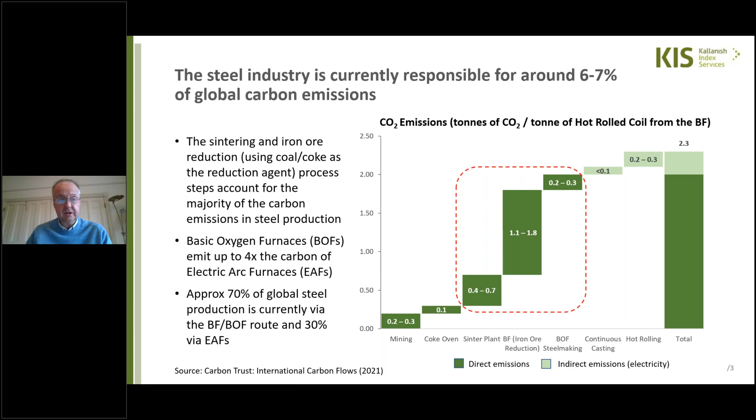At the moment, just over half of the major steel companies around the world have published their carbon emission reduction targets to get to net zero by 2050, or in some cases a bit before then. Here's a selection, and Europe is leading the way. It does vary by region, but I think virtually every West European steel company has a plan, while in other regions it's more patchy, it has to be said.

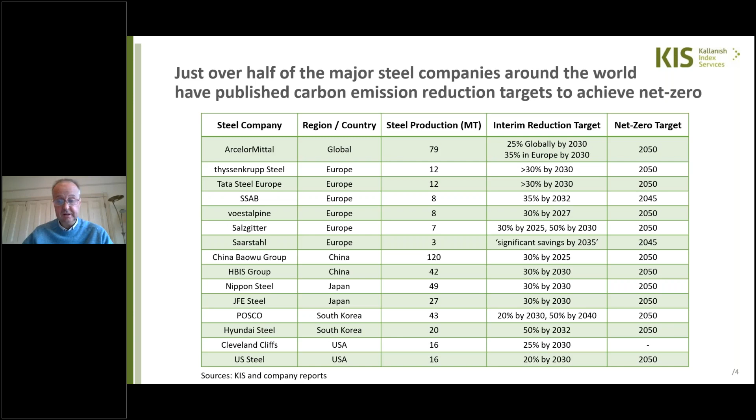Given that the largest companies are going to have the biggest impact on global emissions - and six of the 10 largest steelmakers are in China - you can appreciate that at the moment it's around 13 of the top 25 steel companies that have plans. So there's still quite a long way to go outside Europe for getting all of this in place. And I think even more importantly, few companies, although notable exceptions including our guests today, have committed much capital to this so far. In a lot of cases, it's more talk.

Blast furnace operators can reduce their carbon emissions to some extent by optimizing existing processes, and certainly by implementing some carbon capture on off gases and so on, as the table below shows. But if you're going to achieve significant reductions and get to net zero, it's hard to see how that can be done without investments from companies that have blast furnace routes.

This either means investing in existing technology, effectively electric arc furnaces melting scrap and DRI, or looking at new technologies that will enable iron ore reduction in the blast furnace without the use of coal, carbon and coke. But in all approaches, hydrogen looks as though it's going to play a major role, whether it's producing green direct reduced iron to go into EAFs or through another process.

Most steel companies are taking a multi-strand, phased approach as well. This isn't just jumping to the ultimate solution of net zero with a single investment bang - it's just not feasible. So most companies are putting together a package where they're optimizing routes, implementing capture or offset, and then looking to use new technology.

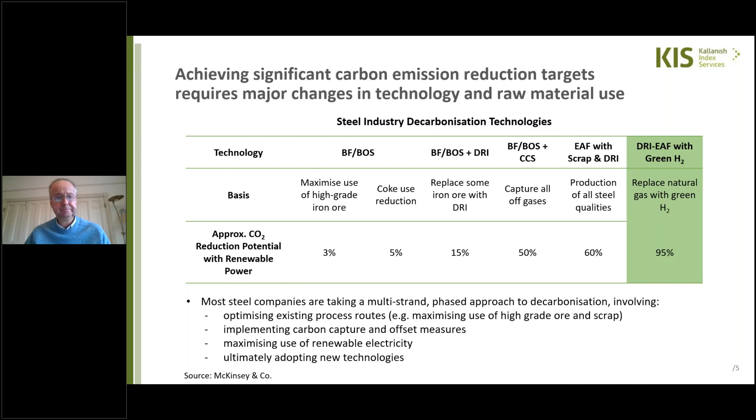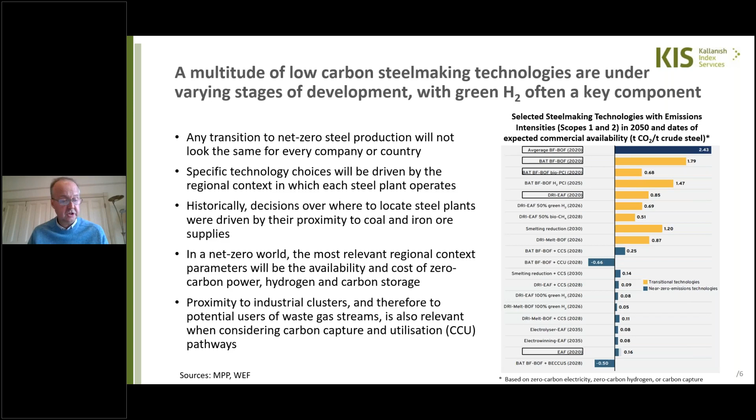There's a whole multitude of technologies under varying stages of development out there. As you can appreciate, this is such a big challenge, and there's lots of ways to approach it. It's certainly not going to be one size fits all when it comes to adoption either. Specific technology choices will be driven by the regions steel companies are in, and by their access to low carbon or zero carbon renewable power, their access to hydrogen potentially, their access to carbon storage, and so on. So it's a complicated arena, and not one that has a simple answer.

So if we just focus on the EU for a moment, as I've said, it's pretty much leading the world in the decarbonisation of the blast furnace route. Currently, about 55% of steel in the EU is made via that route. And the map on the right here endeavours to indicate many of those decarbonisation projects.

We're going to be hearing later from SSAB about Hybrit and from ArcelorMittal about its various projects. If we look at them overall across Europe, the numbers show the sort of projects, and some of those projects are named in the text on this slide. The majority, not all, but the majority include investment in producing DRI, certainly with the long-term intention of using green hydrogen as the reducing agent because of the zero emissions that's possible.

So if you look at the EU plans alone, just the EU, the DRI capacity additions that have been announced up to 2030 - so that's just in the next 7 years - amount to about 34 million tons of DRI. Now, global DRI production last year was about 119 million tons. So you can appreciate that's a significant investment, if - and it's quite a big if - all of that indeed happens.

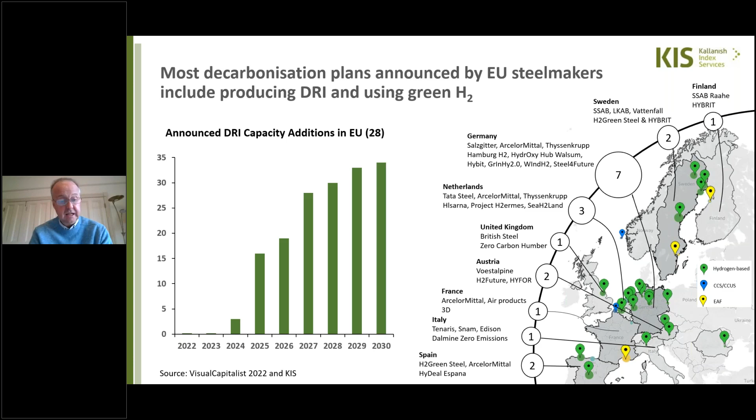And there's then significant implications for raw materials, because DRI, as it stands today, the process requires high quality iron ore, over 67% Fe, and only about 3% of the world's supply of iron ore is that sort of grade. So there's plenty of implications around this.

Let's just quickly look at some metrics about what the use of green hydrogen as a reduction agent for iron ore actually implies. I think the key metric to have in mind is that 1 ton of steel production, if you're going to use this route, requires around 50 kilograms of hydrogen. So 1 million tons of steel production requires 50,000 tons of hydrogen.

And if you're going to produce that with electrolysis so that it's entirely green, then that's a lot of electrolyzer capacity just for 1 million tons, as you can see from the numbers there, and vast amounts of renewable electricity are needed - getting on towards 5 terawatt hours to produce that amount of hydrogen. And indeed, quite a lot of water - 450 million litres are required to produce the hydrogen necessary to produce 1 million tons of green steel.

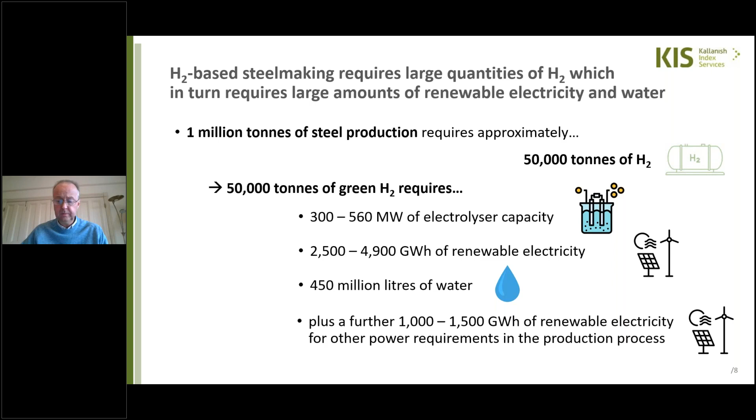So you can quickly see that the magnitude of the numbers is significant when you look at the world - the world produces nearly 2 billion tons of steel, more than half of that in China, of course, and about 1.3 to 1.4 billion tons of that is via the blast furnace BOF route. The balance, 600 million tons or so, is electric arc. So, never mind 1 million tons of steel production, it's more like a billion tons that's going to need to find another reducing agent than carbon for getting to iron.

Cost is another key factor. Most hydrogen produced today is grey or brown, produced using natural gas and without carbon capture. You'll see costs around $1, maybe $1 to $2 per kilogram of hydrogen for that. But once you start adding carbon capture, it gets more expensive, and certainly the electrolysis routes available today, at the scales available today, see those costs going up.

We'll hear more about that from other panelists. But the table and charts here show Kallanish Index Services, which is tracking hydrogen costs for different technologies in different regions around the world, different locations, and this is the sort of ranges we're seeing for the levelized cost of production over the lifetime of the project at the moment.

That cost is highly dependent on electricity, renewable electricity costs. So that's one of the key drivers there. Utilities alone, with water and so on, is getting on for 3/4 of the cost. Now, at the current costs we're seeing for green hydrogen, that's going to add up a lot to the cost of producing a ton of steel - hundreds of dollars potentially at this sort of level.

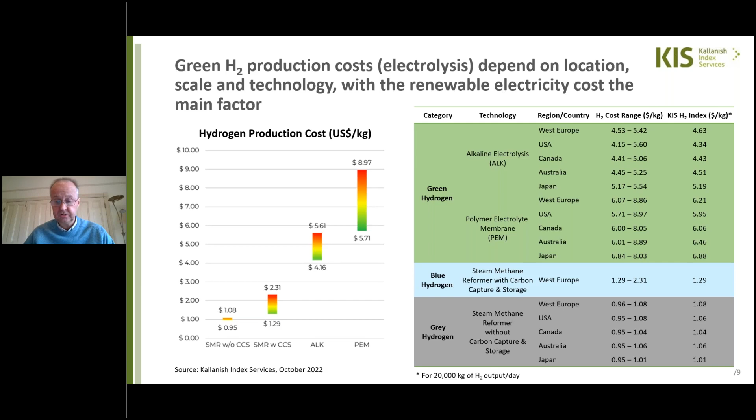It's estimated that those costs have got to come down quite a lot as the scale of electrolyzers and so on increases. This can be possible, and renewable energy costs decrease too. Now, regions with the natural resources to do this - and that's again back to renewable energy first and foremost, sun and wind, and hydro where it's available as well - these are going to be the low-cost areas to produce hydrogen.

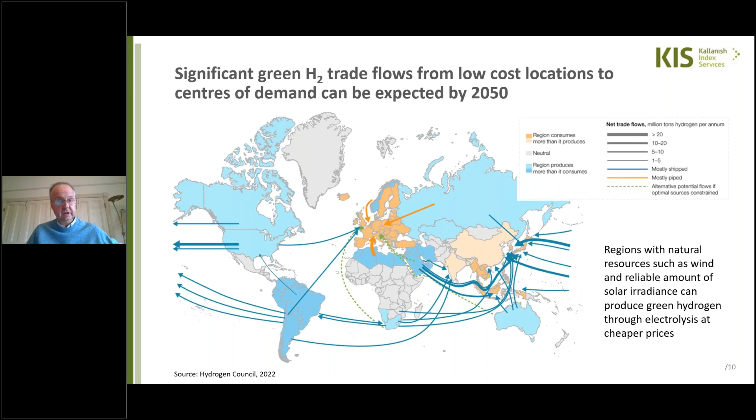So that's likely to set up significant trade flows for hydrogen if this level of hydrogen is going to be used, this quantity, to decarbonize the industry. So I think the message is pretty clear, isn't it? Green hydrogen can decarbonize the steel industry, but it's going to involve massive challenges.

First and foremost, the scale of hydrogen generation that's going to be required. Go back to that - 1 ton of steel needs 50 kilograms of hydrogen. If you're going to use this approach, then the estimates get you up to something like 52 million tons of green hydrogen per annum. And the world today is only generating less than 100 million tons of grey hydrogen for all purposes. So you can see the implications there.

Scale of renewable energy, obviously vast. Again, according to Wood Mackenzie estimates here, the steel industry alone would need 2/3 of the current renewable energy capacity, and obviously most of that is going into power. The costs we've talked about, and the availability of that high-grade iron ore, if you're going to use the existing DRI route. Now there's efforts to develop those technologies to enable them to be used with lower content Fe, so that iron ore supply isn't going to be such a constraint.

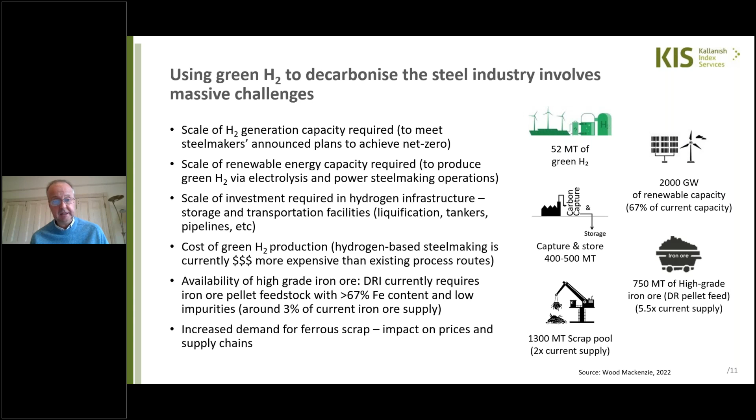Also increased demand for scrap, maximising the use of that, but that's going to have an impact on prices of scrap and trade flows. Big exporting regions for scrap today may be hanging on to that scrap far more, and that'll have implications for regions that currently rely on importing scrap.

So those are some of the challenges, and that's before we even talk about the money. There's the investment required, and again, a Wood Mackenzie estimate here - but if the steel industry is going to achieve net zero by 2050, they're putting the costs of doing this, for investments, in the order of sort of $1.4 trillion US. So that's no small challenge, and you can see most of that going into the iron making, steel making sort of areas.

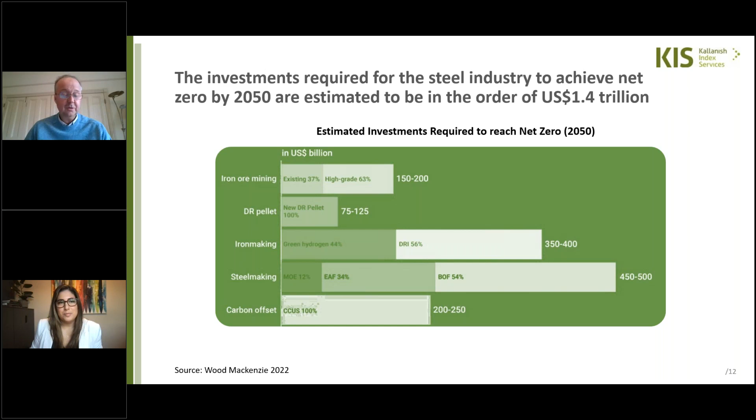Inevitably, the question is, where's the money coming from? The steel industry hasn't always comfortably achieved a good return on its capital. So finding this sort of money to make these investments to achieve this is no small question.

That sort of wraps up my overview. As I've said, Kallanish Index Services, as Gabriella mentioned, is a new subsidiary of Kallanish, and it's going to be launching its hydrogen subscription service sometime next year. Kallanish Index Services focuses on the data side of things, complementing the news and other insights you've already received from Kallanish. We'll be tracking those hydrogen production costs, tracking projects around the world for ammonia as well, looking at breakthrough technologies where they are emerging to try and change some of the equations we've seen here about what's required, and so on.

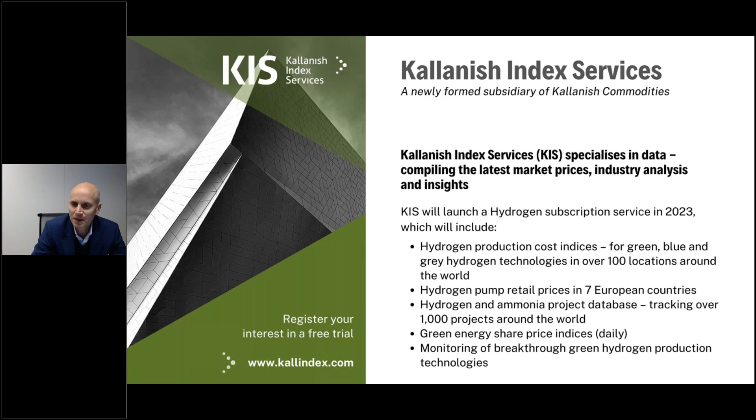Håkon, can you please tell us about how green hydrogen can be produced and all about electrolyzers? Please, the floor is yours. Sure, thank you, Gabriella. My name is Håkon Volldal, I am the CEO of Nel Hydrogen, and I'll give a short introduction to Nel and hydrogen for steel making.

Nel is a global dedicated hydrogen technology company. We deliver solutions to produce, store, and distribute hydrogen from renewable energy, what we call green hydrogen. Our mission is to unlock the potential of renewables and enable global decarbonization. We cannot be successful without our customers, and as was presented just a few minutes ago, the steel industry could be a big user of electrolyzers and green hydrogen to decarbonize.

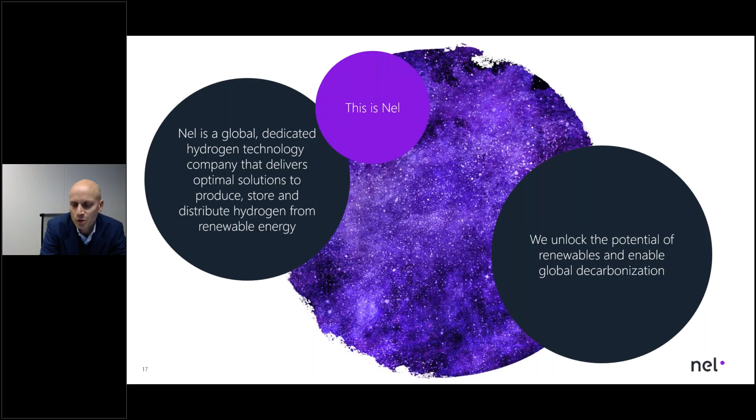Just a few facts on Nel. We can actually trace our roots back to 1927 when we installed the first electrolyzer in Norway, and I'll get back to that in a second. But the modern Nel started in 2014 when it was spun off from Equinor, the oil and gas company in Norway, and publicly listed on the Oslo Stock Exchange. We have the world's largest installed base of electrolyzers, roughly 3,500 units in 80+ countries, but bear in mind a lot of these installations are rather small electrolyzers.

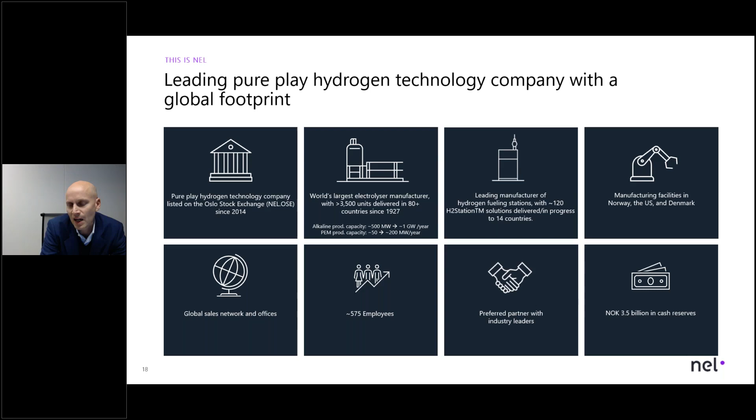We have manufacturing capacity in Norway, the US, and Denmark for fueling stations, which we also deliver. We have received orders for more than 100 fueling stations, but that is not the focus of this presentation. We have roughly 600 employees and a global sales network. We have been a preferred partner with industry leaders, not only in steel but in various industries, as hydrogen is increasingly being regarded as a solution to decarbonize. And we have raised close to 350 million euro to fund expansion of our manufacturing capacity for electrolyzers.

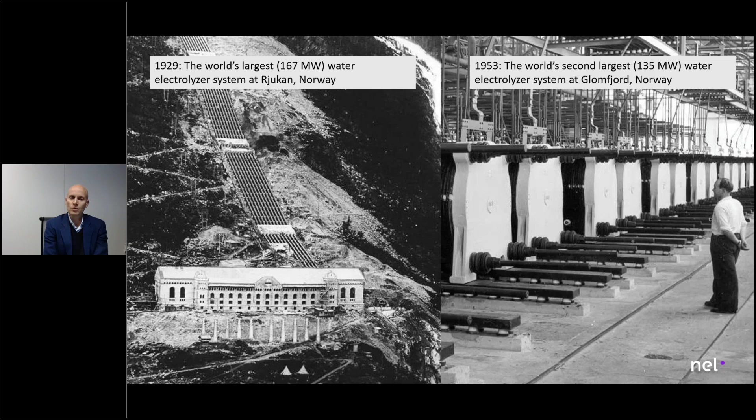I would like to start with this. Why do I start with this? Well, on the left-hand side you see the world's largest electrolyzer facility ever built. It's not in operation anymore, but the largest electrolyzer plant today is roughly 20 megawatt, in Spain, operated by Iberdrola, delivered by Nel. In 1929, the world's largest electrolyzer facility was built in Norway. It was based on hydropower, and it was used to produce ammonia for fertilizer production. And if we're into World War II history, this was the power station that was sabotaged by the Allied forces to stop production of heavy water, which is a byproduct from electrolysis.

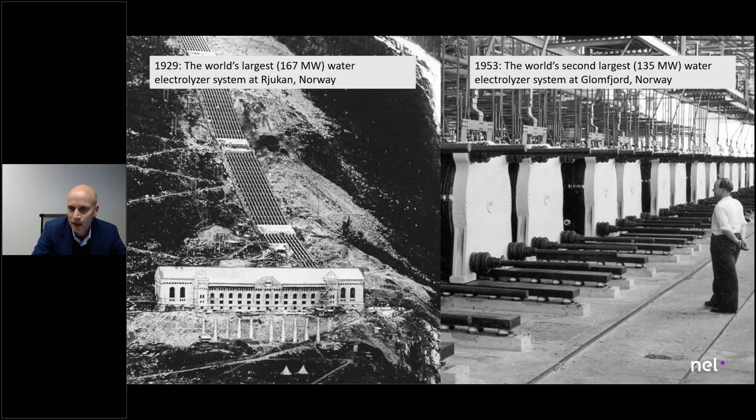On the right-hand side you see the second largest facility ever built, in 1953, 135 megawatt, also in Norway, for ammonia production. The reason I start with this is that the scale of what we're looking at, you get an impression by the picture on the right-hand side. This is what we're going to do in the steel industry, times a factor of 3, 4, 5, 6, 7. Most steel factories will need between 0.5 gigawatt and 1 gigawatt of electrolyzer capacity to produce what they want to produce. So the scale-up is massive, also in terms of electrolyzers.

We are doing our part. We are currently investing in both alkaline technology and PEM technology. We have atmospheric alkaline technology, and we are also developing a pressurized alkaline system. And we are looking at some future technologies that might bring together all the positives of the PEM technology, combining that with the positives of the alkaline technology.

But I have to be open, and I can be that because we are technology agnostic. There are numerous technologies out there, and I think it's fair to point out that no technology has only advantages. They have advantages and disadvantages. It depends on the application.

If you want to produce hydrogen at scale today, I would argue you only have one technology solution, and that is alkaline. Over time, you will have PEM. In the longer term, you will have solid oxide and some other alternatives. But today, only alkaline has been proven and tested at scale.

Because if you invest hundreds of millions of euros into a DRI facility and want to use electrolyzers, you have to make sure they actually work. And if you want the plant to run for at least 10, maybe 20 or 40 years, the electrolyzers should have a similar lifetime. Now, if you buy electrolyzers today, only one company has had electrolyzers in operation for 8 to 10 years. Actually longer, but typically an electrolyzer lasts 8 to 10 years.

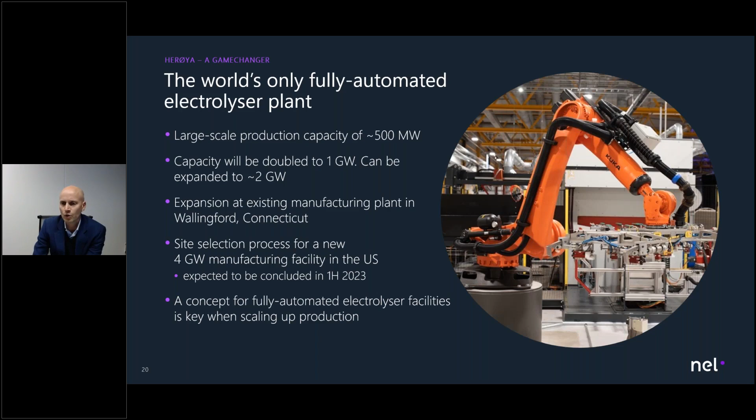Now, a couple of examples of what we have done. We have been involved—and SSAB will talk about this later—in a pilot project in Sweden where we replace coal with green hydrogen to produce the world's first fossil-free steel, done in August 2021. It's a 4.5 megawatt alkaline electrolyzer pilot.

We're also building a 20 megawatt alkaline electrolyzer to pilot Ovako's steel recycling. It will be the world's first use of hydrogen and oxygen in the heating process, and hydrogen production is expected to start in the second quarter next year. The conversion to green hydrogen will cut CO2 emissions from current levels by 50% in that steel recycling process. So interesting developments, but bear in mind we are in the scale-up phase, and I guess the panel debate will focus a little on what we can expect going forward.

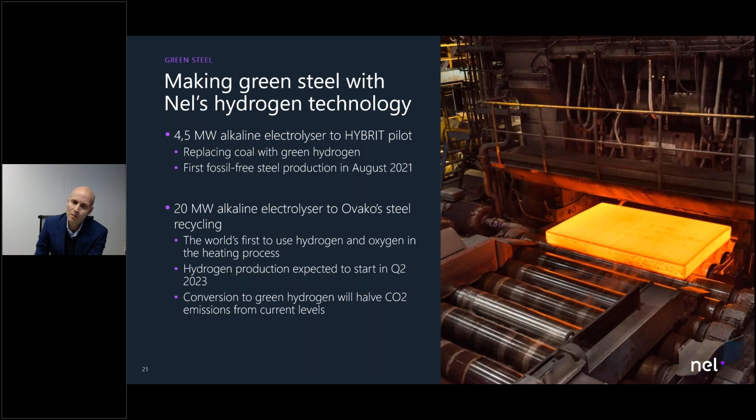What I wanted to conclude on is that we are doing our part in terms of raising capital and building out capacity so that you can have electrolyzer capacity for steel projects, and also bringing down the cost to make it affordable.

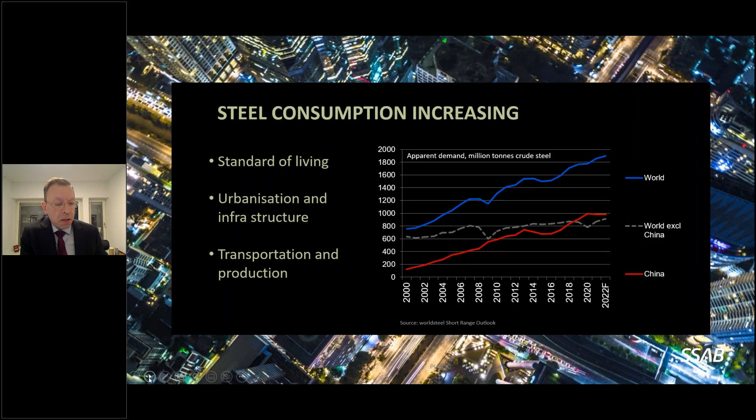This growing steel consumption is also the reason why recycled scrap metal can't cover the world demand of steel. Right now it covers around 25-30% of world steel demand. The rest needs to be made from virgin materials, from iron ore. Even though we expect recycled material to increase to 50% by 2050, the remaining 50% still needs to be made from iron ore, and that's actually slightly more than the iron ore based steel production we have in the world today.

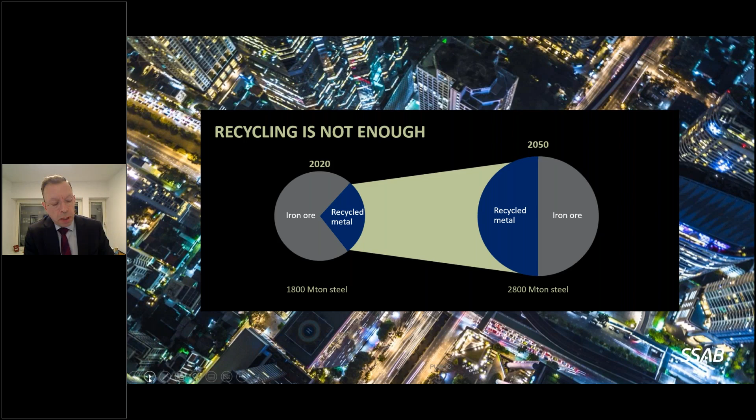That is why we need, as Steve pointed out earlier, to decarbonize iron ore based steel making in the world. And that's what we have set up to do at SSAB with our HYBRIT technology.

We have communicated two objectives to our customers and other stakeholders. We are going to put fossil-free steel made without fossil CO2 emissions on the market as a commercial product on commercial terms in 2026. And already in 2015, we said, as indicated also on Steve's slide, that we're going to be an entirely fossil-free steel company by 2045.

But the development around us—politics, demand from our customers, and also ourselves—has been moving much faster than what we dreamt. So earlier this year, we told the world that we are accelerating our decarbonization process, and we will be a largely fossil-free steel company already by 2030.

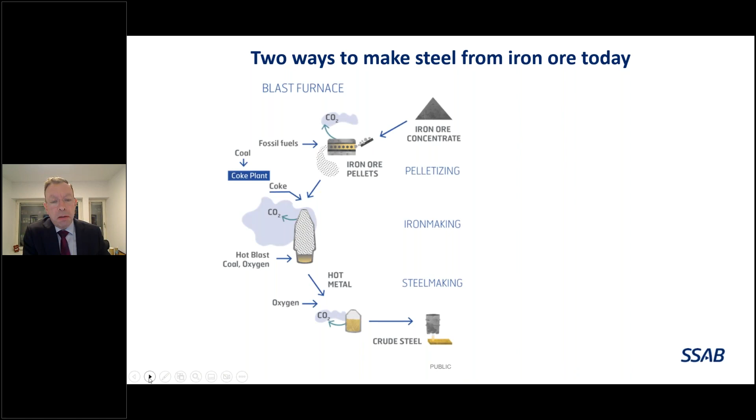This is based on using hydrogen-based steel making. If we look at the conventional blast furnace on the left-hand side, that is the main culprit when it comes to CO2 emissions. For those among us who aren't metallurgists: our raw material, iron ore, is pretty much iron oxide, and to get to the iron, we need to remove the oxygen. Since the blast furnace was invented in the 1300s, this has been done with carbon in the form of coke. The oxygen moves to the carbon and forms CO2, and we're left with the iron, which is what we want.

This also means that for every ton of iron you make, you get at least 1.5 tons of CO2 as part of the deal, often a little more, even though we're generally rather good at this in Europe, and at SSAB we're rather close to this lower limit of what is even theoretically possible. But in the future, what we want to do is expose the iron ore to hydrogen instead. Then the oxygen in the iron ore moves not to carbon to form CO2, but to hydrogen to form H2O, also known as water, as a byproduct.

We have the advantageous situation in both Sweden and Finland that we have a virtually CO2-free power grid, which means we can use electricity to make hydrogen out of water with electrolysis. Hydrogen that we can store, if we like, is a storable commodity, and we put it into our process, and then we get the water back as a byproduct again.

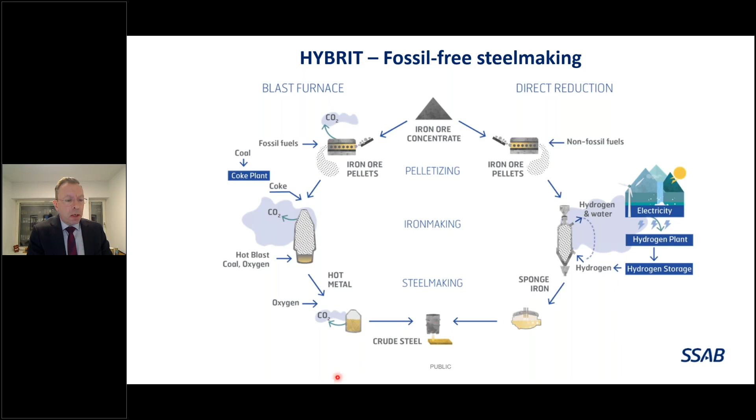If we take a quick look at the time schedule, we have built, as Nel showed already, a pilot plant for making fossil-free sponge iron. This is a technology known in the past, but really only on laboratory scale - nobody has done this in an industrial environment, and that's what we wanted to learn to do in an optimum way.

This plant was inaugurated in 2020, and as you saw earlier, in 2021 we also rolled the first fossil-free sponge iron - or rather, we melted it into steel and rolled it into steel plates. We'll continue using this pilot plant up until 2025 or so to learn as much as possible. We've also made a pilot for storing hydrogen, doing this in underground rock caverns located 30 meters below ground next to our plant in Luleå, northern Sweden, next to this pilot plant.

We are now in the preparation stages for building a demonstration plant - a full-scale industrial plant with a capacity of more than 1 million tons of steel - that will go into production in 2026, in time for those commercial deliveries we've committed to making.

At the same time, we will have built an electric arc furnace at our Oxelösund facility that can melt the sponge iron so we can turn it into steel. More importantly, at the same time, we'll close down the 2 existing blast furnaces at this facility so we're ready for commercial deliveries to commence in 2026. Then in the coming years, we'll step by step close down the remaining SSAB blast furnaces to be a 100% fossil-free, or at least largely fossil-free, steel company by 2030.

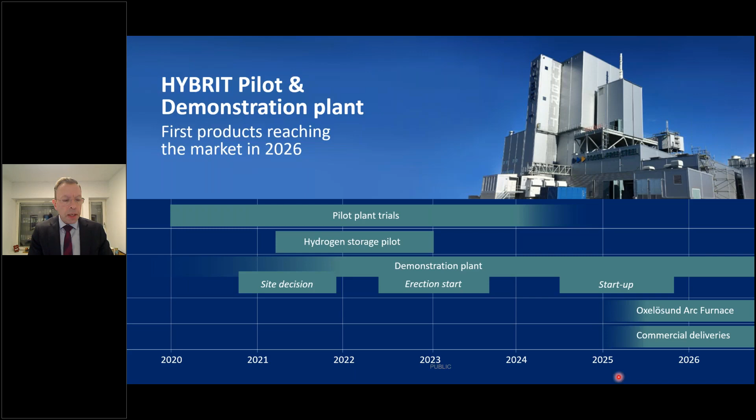It will have a capacity of 1.3 million tons of sponge iron in the first stage, roughly corresponding to the same amount of end products, and we will a little more than double that by 2030. We believe putting it next to the mine gives us synergies in terms of logistics, transportation, electricity supply and so on, and also being close to the actual pelletizing plant where LKAB is turning the iron ore into pellets, from which we're then making fossil-free sponge iron.

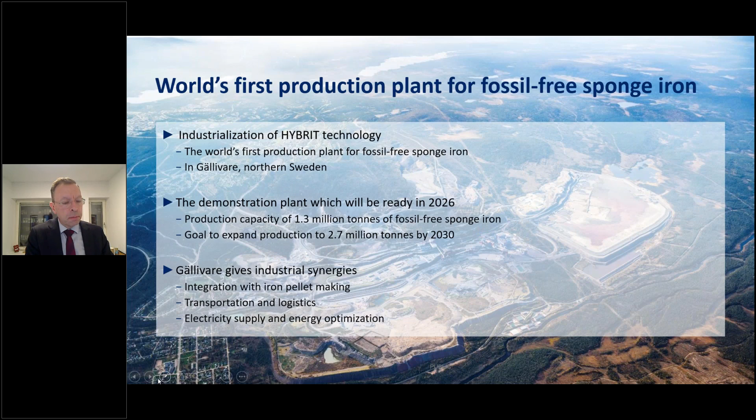And we are producing a little already today, as we have seen. This is the first plate that was rolled. It was delivered to the Volvo Group in a small ceremony in July 2021. And a little later, in October '21, Volvo also showcased the so-called Tara, an autonomous, driverless electric mine truck.

A little earlier this year, in May, also this articulated dumper, which is now in commercial use by one of the construction companies in Sweden, built from fossil-free steel. And if you're buying an electric heavy truck from Volvo today, there are good chances that the chassis beams are made of fossil-free steel as well.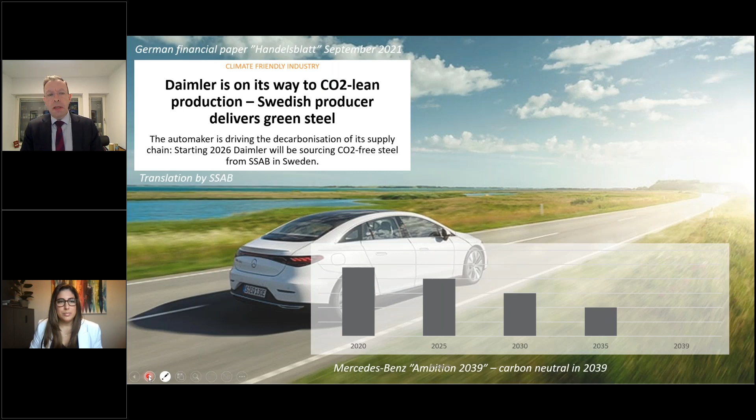Another company you may have heard of is Mercedes-Benz, which has a very ambitious goal called Ambition 2039 of becoming carbon neutral. They have recently also tested our fossil-free steel in a 1500 high-strength automotive steel, where they were happy to communicate that they can confirm it has at least the same properties as conventional materials.

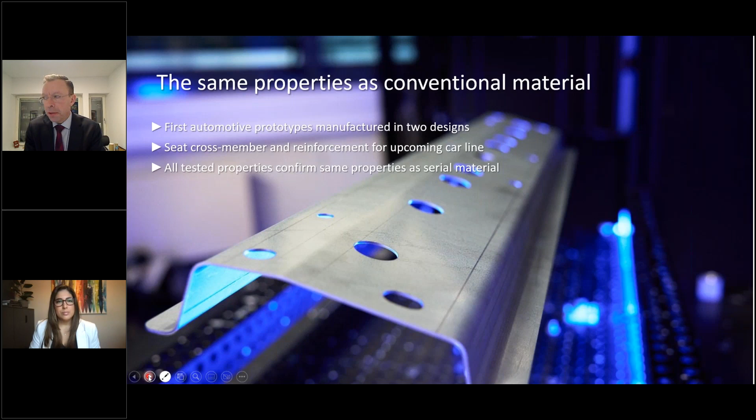All of which is our way of sharing a little of what we do. In the unlikely event that I haven't bored you to death already, you can also look at ssab.com/fossil-free to know all about our fossil-free journey going forward.

Thank you, Thomas. We're all awake. You haven't bored us at all. And if I may say so, for, as you said, a small steel maker, what you guys are doing is impressive. Thank you. Thank you so much.

Some reminders, nevertheless, first. As Thomas mentioned, steel is a large emitter of CO2 in the industry, but steel is also a necessary material, and we have seen that also in the presentation from Steve. The demand for steel will continuously be growing, and will not only be growing but will be required to ensure the decarbonization of other sectors.

There is no wind power without steel. There is no solar energy without steel. Even electric cars need electrical steels, what we call magnetic steels, for their engines to work. So without steel, there is no decarbonization of the rest of industry. This is why we are confident that the steel sector will continue growing. And as mentioned previously, we need to make sure that this steel is also being decarbonized, and not transferring the burden from one sector to the other.

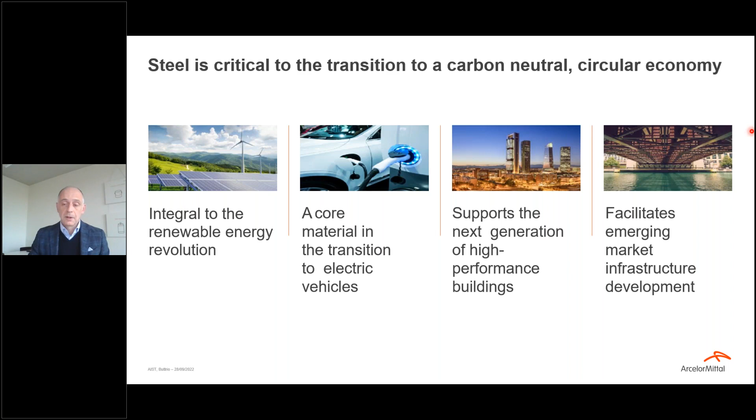So ourselves as a company, we have very early committed to decarbonize our production. Our target, announced already some years ago, was to be net zero in 2050. We had also announced a reduction of our scope 1 and 2 in Europe of about 35%.

But as you will see, as with many other steel makers in Europe, the rules, the regulations, and especially Fit for 55 have changed a lot of things. This pushes everyone to decarbonize quicker, and thus we expect the global steel industry, and especially the European one, to go beyond that target.

Obviously, it's important that facts and figures do not remain green claims, and we commit to the Science Based Targets initiative and methodology to make sure that we, as a steel maker, are following the right pathway to net zero steel emissions in our production by 2050.

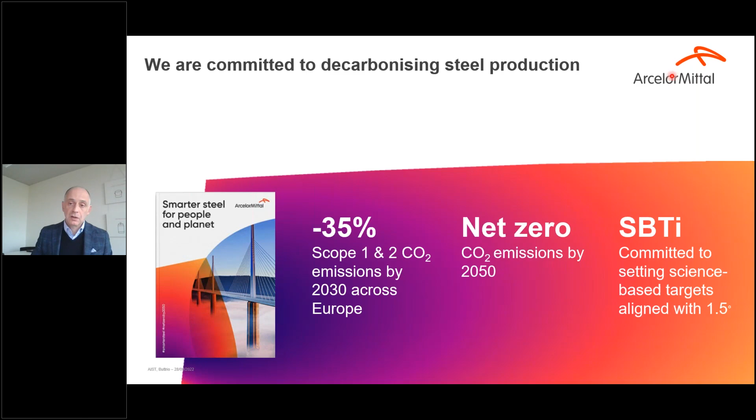So, a very quick reminder on why hydrogen is needed in the steel industry. Today a large portion of the steel industry is made out of blast furnaces, what we call the primary production route, using iron ore and coal. We just heard that the iron is naturally oxidized, so we still need to take this oxygen away.

Today it's the coal which does this operation, and the consequence, unfortunately, is the production of CO and CO2. That's why we want to change and use hydrogen instead.

We're changing our assets to direct reduction plants. We would replace the use of coal with hydrogen, which will produce water mainly, on top of the iron that we will then melt in electric arc furnaces.

The pathway is almost the same for a lot of European steel makers, which are following a very similar route, and this should lead to a level of decarbonization around 90%. So hydrogen is really key to making this first, very important step.

There could be a second step, because we do not reach full decarbonization doing that. There is still a certain portion of CO2 remaining in the loop for various reasons I will not develop here. But there could be an option to capture the remaining CO2, and instead of letting it go to the atmosphere, there are solutions that, with the help of bacteria that digest this CO2 but also need hydrogen, produce some chemical components.

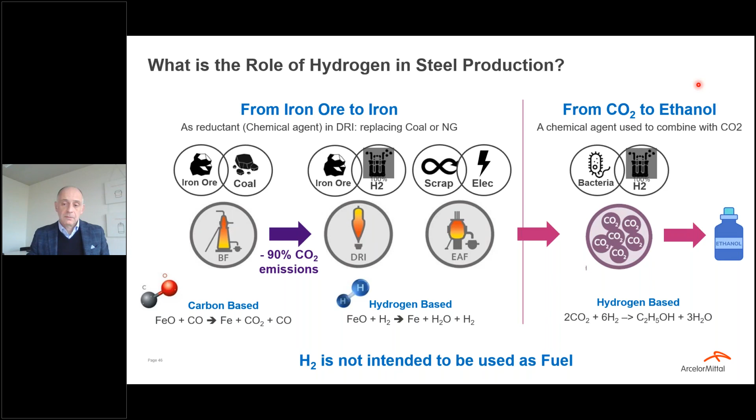We heard some figures from Steve before. These figures that I'm presenting to you are slightly different because we are reasoning always on a 2.3 million ton direct reduction plant, which is the classical size rising on the market. You see here that for a 2.3 million ton direct reduction plant, the quantity of hydrogen needed is 150 KT. This is a huge quantity, as we have just heard.

This could be complemented by additional needs, for other reheating operations in our cycle, or, as I just explained, for transforming the remaining carbon into chemical molecules that could be used by other industries. And you definitely need additional power generation to feed the electrolyzer that will produce the hydrogen.

It is very important, and this will lead to the discussion on which kind of hydrogen is needed and which kind of electricity. You see that depending on the electricity installed, the quantity of installed capacity required is very dependent on what you're targeting.

For instance, for a 1 gigawatt electrolyzer, we would need roughly 20% more coming from continuous production, from classical energy production. This could be, for instance, nuclear power in some countries. Due to the load factor and intermittency of wind energy production, you should roughly double that installed capacity to reach the same output. And for solar, it's even more than 5 times more, to have the same base load in terms of electrolysis capacity. So depending on where you produce, the role of electricity will have a very strong impact.

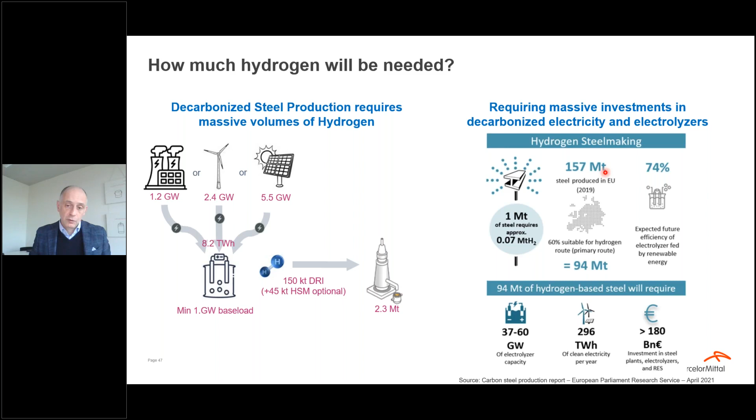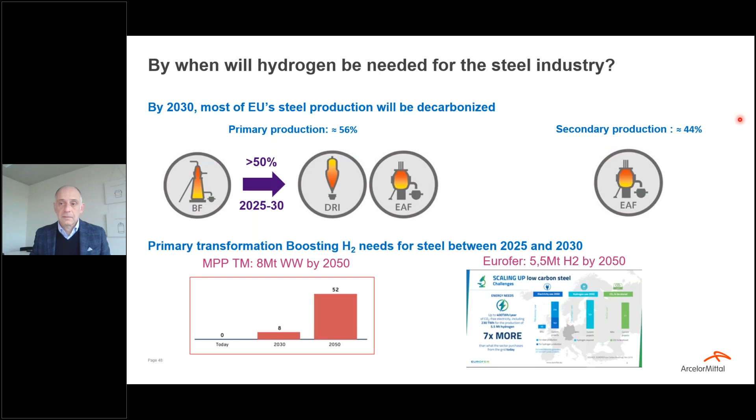If I go to the next slide - sorry, there seems to be some lag. I've just spoken about the needs for hydrogen. What is hampering us from reaching that level today? Why don't we have more hydrogen available?

First of all, what we need as steel producers is a high availability of hydrogen. We will need great stability of the hydrogen supply - I'll develop these points immediately. This hydrogen will need to be decarbonized, otherwise we replace fossil fuel with a non-fossil-free hydrogen and have no savings. And it needs obviously to be affordable, to replace the current energies it is going to replace.

In terms of availability, our first concern is whether the production and the needs we will have match the production coming on stream. And if not, should there be a prioritization per sector? A lot of sectors are fighting for the first ton of hydrogen. In terms of legislation, there is still a lot to be done for transmission, for storage, and regulation is not helping the stable supply of hydrogen to the steel industry.

A lot of regulation is still missing for hydrogen. We are just discussing at European level what the hydrogen and decarbonized gas packages should be. So even for investors in the hydrogen business, the rules are not clear, especially for transmission and storage - it's quite difficult. Then, being decarbonized, we obviously need to know what decarbonized steel and decarbonized hydrogen means.